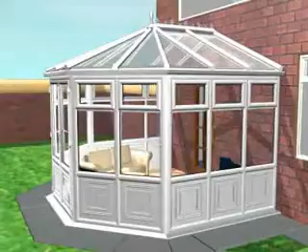Synseal have afforded their profile customers the luxury of exclusivity on the Shield conservatory roof. No design compromises have had to be made to make it fit any profile. One benefit to this is that the installer does not have to insert numerous screws into the outer frame to fasten the eaves beam into position.

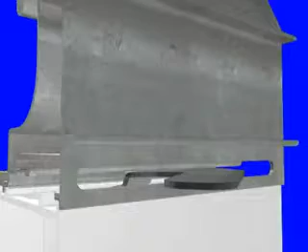Now he simply moves the lever on the inside of the conservatory. Once engaged, this lever knits the eaves beam and outer frame together, not only securely and easily, but more importantly quicker. The eaves beam is a triangular box section.

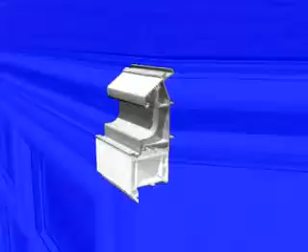This produces an exceptionally substantial and strong product that in turn means the one eaves beam section caters for all design and loading variations. Once this box section has been screwed onto the walls of the conservatory, the corners are securely fastened together with the specially designed fixing cleat.

The Shield ridge component enables all pitch variations between 15 and 35 degrees without the requirement for additional components. When the ridge arrives on site, there's no assembly required, with the exception of the cappings. It simply locates ready to receive the glazing bars.

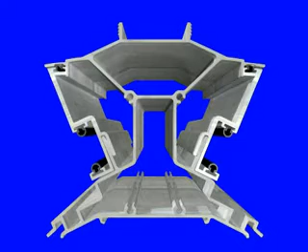Due to our extensive experience in the conservatory market, we've identified that the vast majority of conservatories are on a 25-degree pitch. The Shield conservatory roof system also boasts a fixed ridge section to make the fabrication and installation of this product even simpler. The unique radius end, otherwise known as the spider, is also simplicity itself.

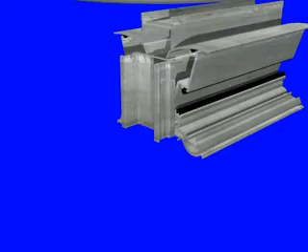The elevator mechanism within the radius end allows for pitches from 15 to 35 degrees on all popular conservatory designs. One product for all situations. Precast location grooves on the radius end eliminate the necessity to drill this component at either fabrication or installation stage.

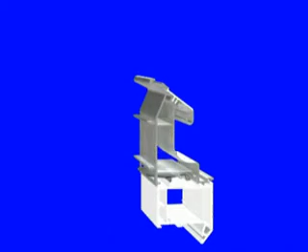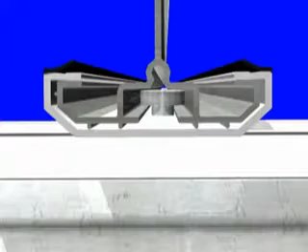Once the eaves and ridge have been installed, both hip bars and rafters simply click into position. The unique central rafter fixing design also reduces by half the amount of fixing points required per conservatory. There is only one at each end of the glazing bar.

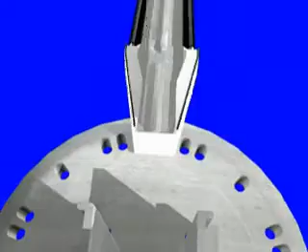This central bolt fixing in the glazing bar also eliminates the requirement for fiddly brackets and adapters to be fitted onto the end of hip bars, brackets that could weaken the structural integrity of the installation by producing excessive joints.

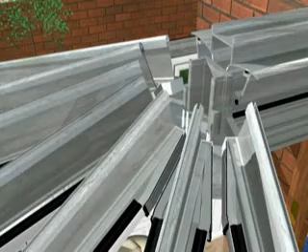Shield hip bars are purchased with the tapered cuts pre-prepared, meaning the installer simply slips the sleeve over the tapered glazing bar with the bolt already in situ, and it is ready to click into position. No factory or site drilling, trimming or preparation required whatsoever.

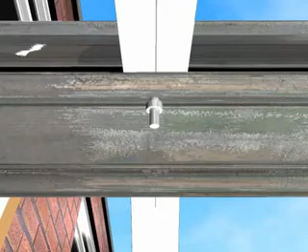Simple. Once the beams have been positioned, locking off could not be simpler. The installer simply fastens one nut to the top and bottom of each beam from inside the conservatory, again eliminating the necessity to physically climb on top of the building, reducing installation time still further.

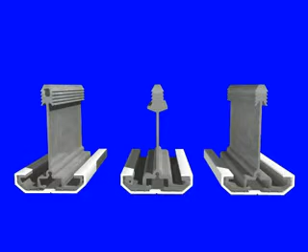Glazing beams are available in 3 different weights: light, medium and heavy, with an additional underbar bolster for the extreme. This range of aluminium weights ensures cost efficiency for all size conservatories.

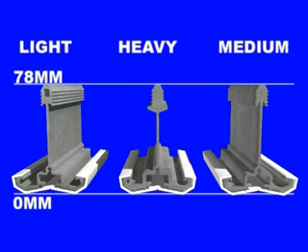Additionally, the heights of all gauges of rafter are a universal 78mm, allowing for cross-utilization within the same building if required. This guarantees the building is structurally sound, and also that no material is used where it may not be required. Polycarbonate depths of both 16mm and 25mm can be utilized within the Shield conservatory system, and when budgets allow, glass roofs are also available.

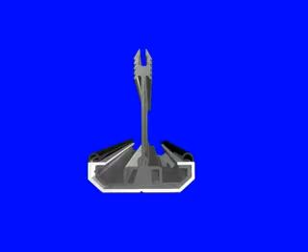Because this roof offers a specific jack rafter section, a sculptured top cap on all glazing bars can be used without the risk of producing a hole at the jointed section. The top of the jack rafter stops at the bottom of the sculpture on the hip bars.

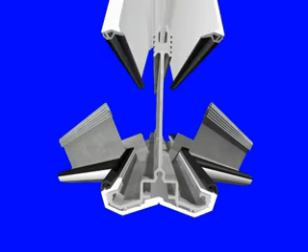The easy technique by which the rafters locate to the ridge is replicated with the jack rafter assembly to the hip bars. The simple hook design enables the quickest of installation times once again.

A Shield wall plate is an exact 50% split of the ridge section. This means that the benefits incorporated within the ridge component are mirrored directly into the wall plate. Because of this, all P-shaped conservatories can be fitted whilst retaining continuous sightlines along through the ridge and wall plate.

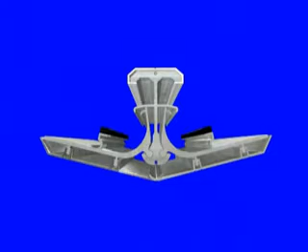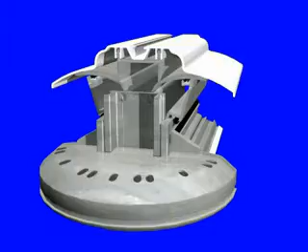The Shield Valley gutter is capable of producing all popular pitch and angle variations without jeopardizing either the weatherproofing or structural integrity. The radius end product, illustrated earlier on the ridge section, offers the versatility of being able to double in both half-spider and full-spider conservatories.

The radius end offers the versatility of being able to double in both half-spider and full-spider conservatories. Screw ports in the wall plate have been positioned to fix a split radius end for the quarter-spider occasions.

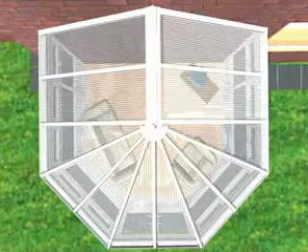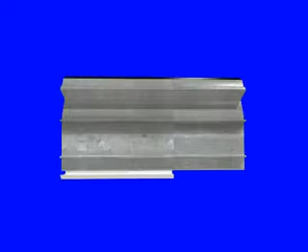When a conservatory roof pitches towards a wall, it does of course necessitate a box gutter system. The Shield box gutter duplicates the shape and size of the eaves beam entirely, resulting in a seamless internal joint. The sculptured non-handed gutter system does not stop to meet one of the myriad of box gutter jointing adapters. It simply runs straight into the universal box gutter adapter. This design enables the use of standard gutter angles to be used where the box gutter meets the conservatory gutter,

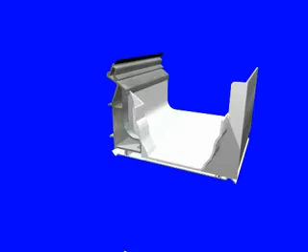whilst the high-capacity box section can carry water from both the conservatory and house roof. The box gutter also incorporates a twin-layered aluminium base, ensuring that at no time does rainwater actually come into contact with a single skin of aluminium to the inside of the conservatory, which would increase the risk of internal condensation.

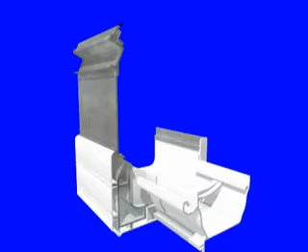Occasionally, high internal edge box gutters are required, at which time antiquated roofing systems need to cloak the welded high internal edge with foam trim products. The Shield conservatory roof does not require these third-party products to produce the required finish. The box gutter underclad is designed to interlock into both itself and also the eaves clad, meaning the perfect finish can be achieved upon any height.

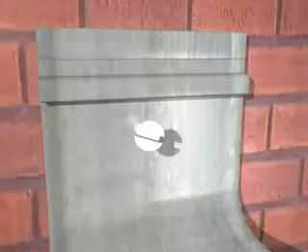Historically, box gutters have been fixed through the external skin of the box section. This not only produces extra leak points, but, as you may already know, causes many headaches for the installer trying to drill and apply a fixing at such a tight angle, especially with a high-edge box gutter situation.

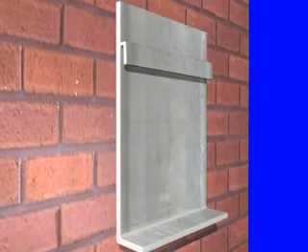Shield has challenged many typecast methods, one of the results being a box gutter fixing plate. The plate sits on top of the frames whilst simply being screwed directly to the wall in as many locations as necessary. The box gutter then clips into this plate with a simple securing screw from beneath. Far quicker and easier to install whilst producing a box gutter without holes and less leak potential.

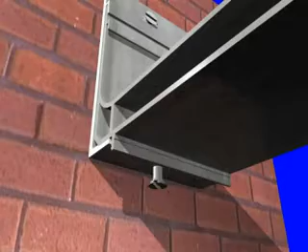Polycarbonate sheeting is fitted into a triple gasket seal at the ridge and sits on top of a co-extruded nitrile polycarbonate support trim between the glazing beams. The caps are then simply tapped onto the aluminium glazing beams.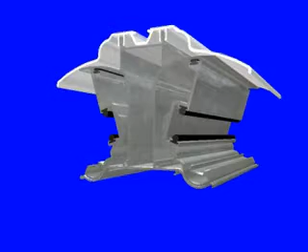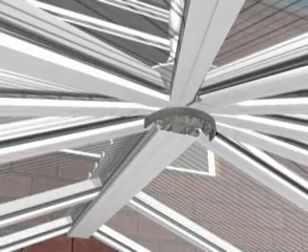The ridge bottom clad fastens in a very similar manner, cloaking both the ridge section and the optional U-channel that can be used for fixing tie bars, lights, fans, or just as a wire channel. The underclad is shaped to work on all pitch variations.

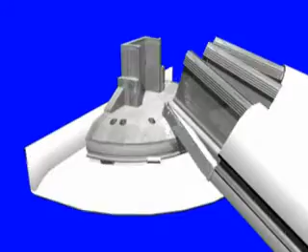At the end of this is, of course, the radius end cap. This has two locating positions, one for 25 degrees and below, the other for over 25 degrees. Again, simple design techniques eliminating unnecessary products, stock holding, and confusion.

The unique Shield conservatory guttering system is installed without the use of unsightly and unreliable gutter brackets. Traditionally, guttering is installed by fixing these brackets at predetermined centres, which can, with time, cause sagging and failure where the gutter is not supported.

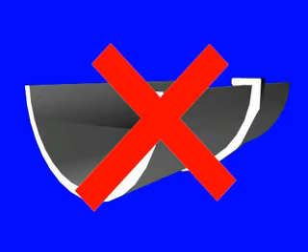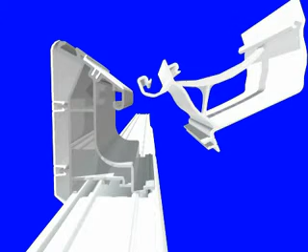Because the Shield gutter has been designed to work with the conservatory roof, not a house fascia board, the profile incorporates a clip-fit mechanism along its length. The installer simply offers the gutter to the eaves beam at an angle and pulls it down into position. Simple.

This design not only increases the ease of installation, but also automatically cloaks the often overlooked area of the eaves to frame, producing a perfect finish on a component that frequently lies at eye level. Of course, this means that there are no visible gutter brackets, giving clean and continuous sightlines around the whole conservatory. The gutter then interlocks into the corner mouldings, replicating the perfect finish, even in what others consider problematic areas.

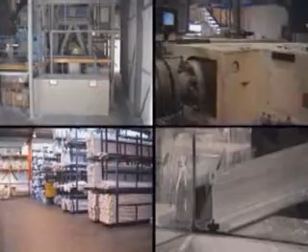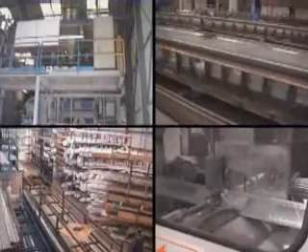Cut out the middleman and make more profit. It's one of the best known and most accurate business principles. The words of wisdom carry even more weight when you cut out up to 4 middlemen in the supply of one single product. This is how the Shield conservatory roof system discounts another old theory that cheap prices lead to cheap products. Because Synseal are responsible for the blending of chemical compound, extrusion of material, distribution of bar-length material, and fabrication of a bespoke product, we're capable of producing a product of the highest quality, quite simply by eliminating the compounded margins of anything up to 4 middlemen.

Additionally, because we are self-sufficient, we can dispatch a made-to-measure conservatory roof on a 5-working-day lead time, which in turn not only generates cash flow for fabricators of Synseal products, but also enables you to concentrate solely upon the fabrication of the conservatory walls, without having to tie up cash in stock holding and other unnecessary costs, such as floor space and fabrication time.